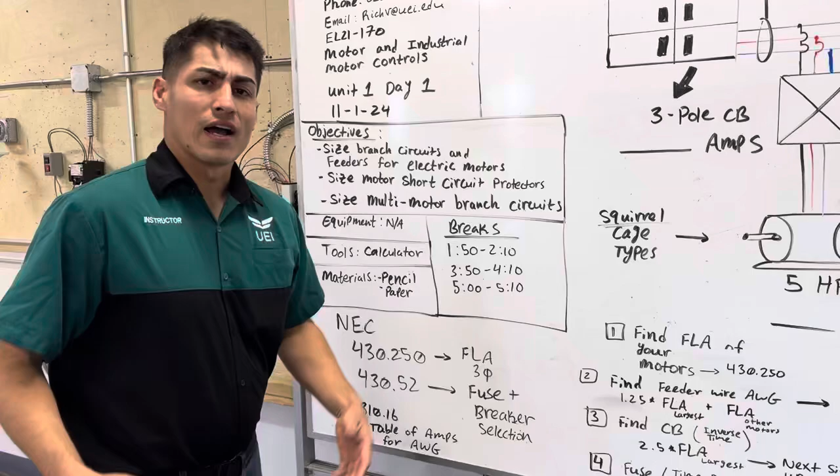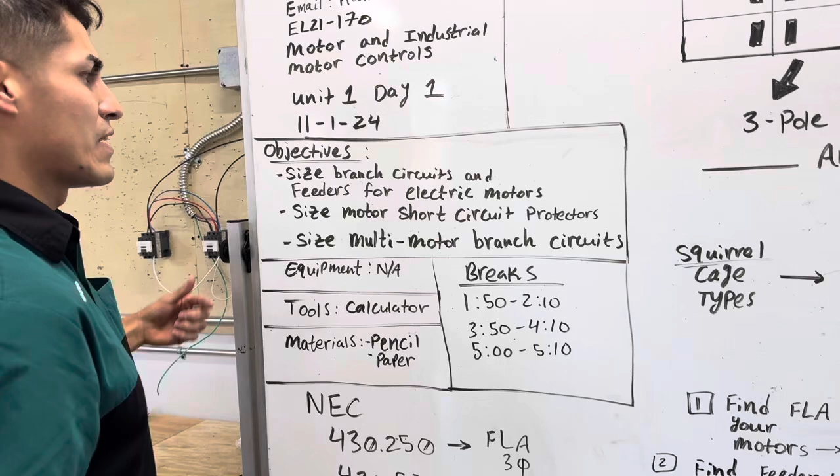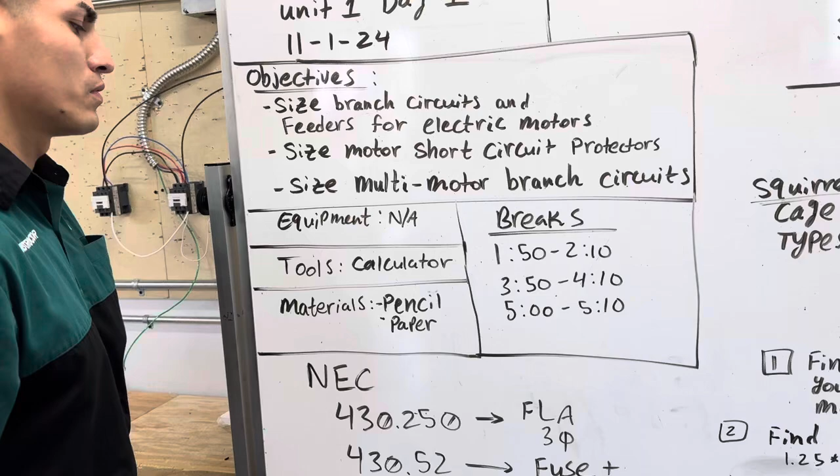Our objectives: size branch circuits and feeders for electric motors, size motor short circuit protectors, and size multi-motor branch circuits. Equipment: non-applicable. Tools: calculator. Materials: at least have a pencil and paper or a pen.

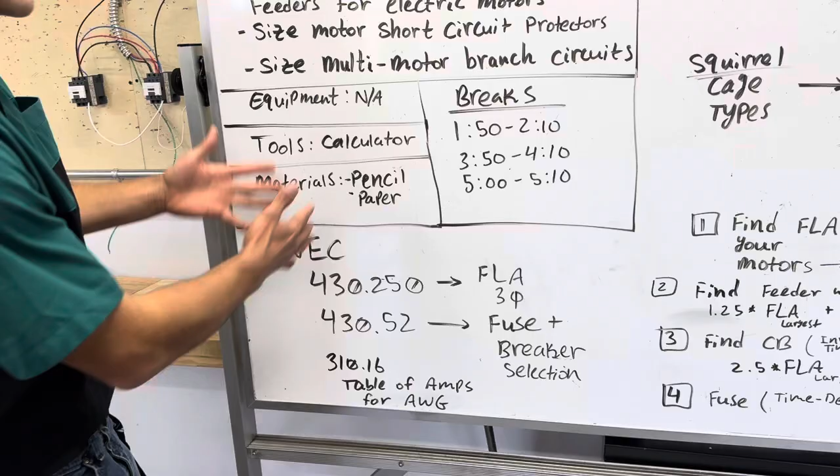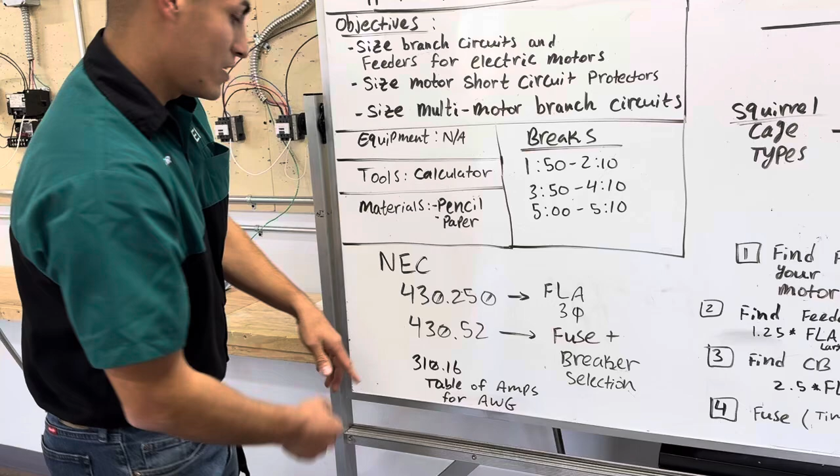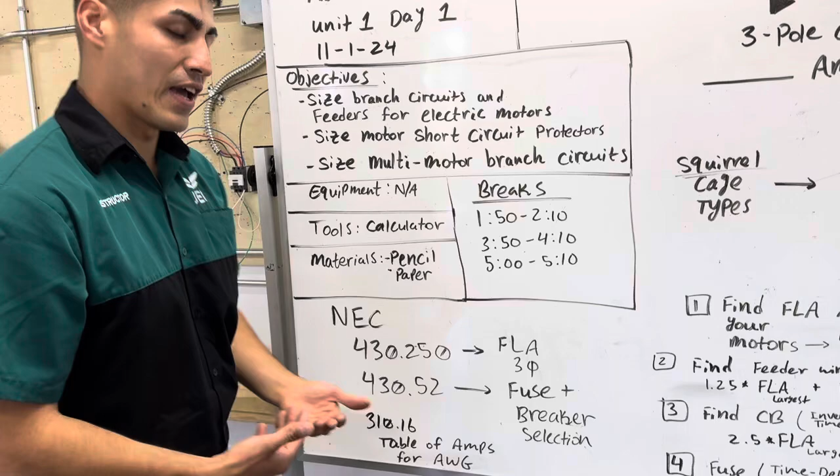Now we're going to refer to some NEC codes that are going to help us in selecting these devices. First, 430.250 for full load ampacities for three-phase motors. 430.52 is for fuse selection and breaker selection. 310.16, or page 73 of our Ugly's book, will help us select AWG depending on ampacity. In addition, we have 240.6A, which will help us see the next size up for our breaker or fuse, which is very helpful.

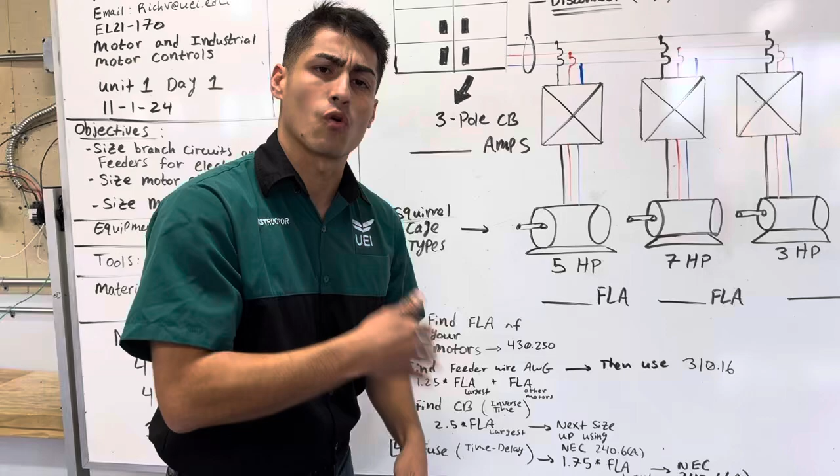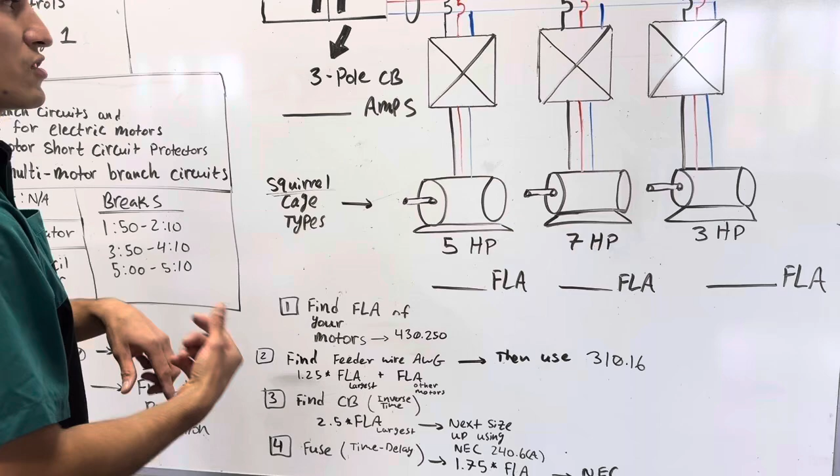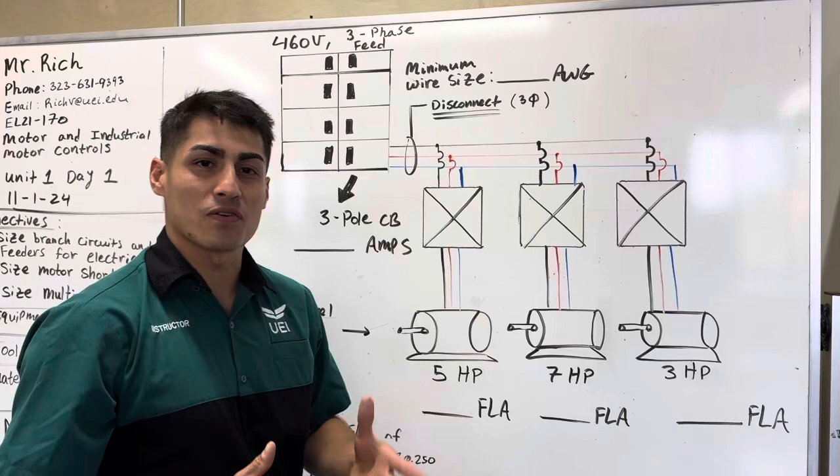Now this is our system here. We've got the MSB, our main panel, and then we have a 3-pole circuit breaker. So it is up to us to find out what amperage that breaker is going to be. In addition, we are required by code to have a 3-phase disconnect here. The disconnect will have fuses, so it's up to us to also find what fuse ratings we need. That will depend on the FLA of the motors.

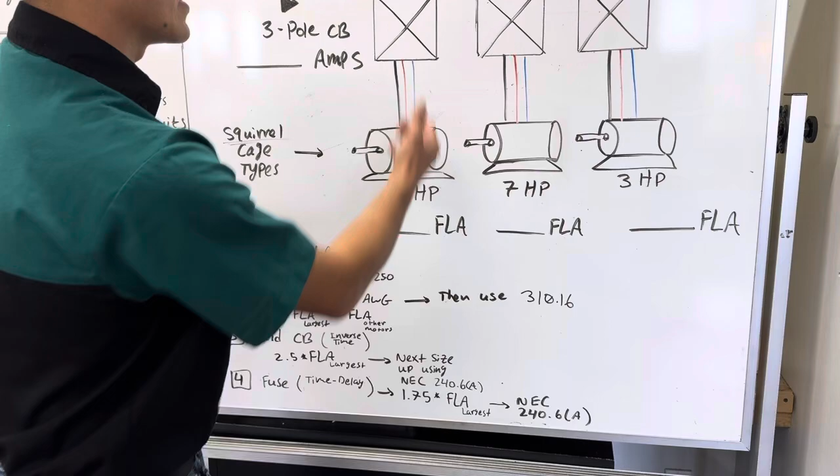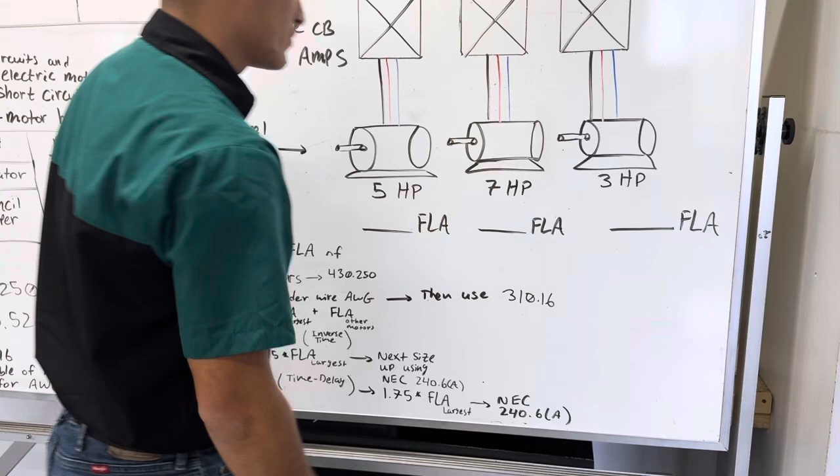And lastly, let's go over the feeder size of the wire. We have to find what wire size we need, depending again on the full load ampacity. This here is your overload protection relay and your magnetic starter, which is important.

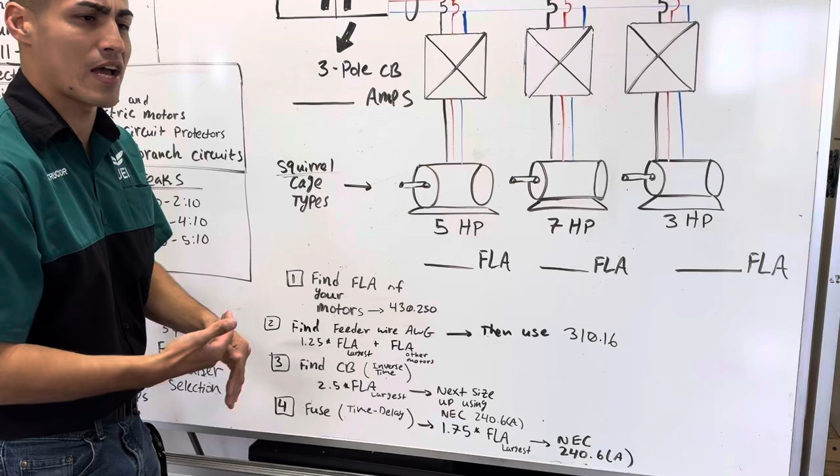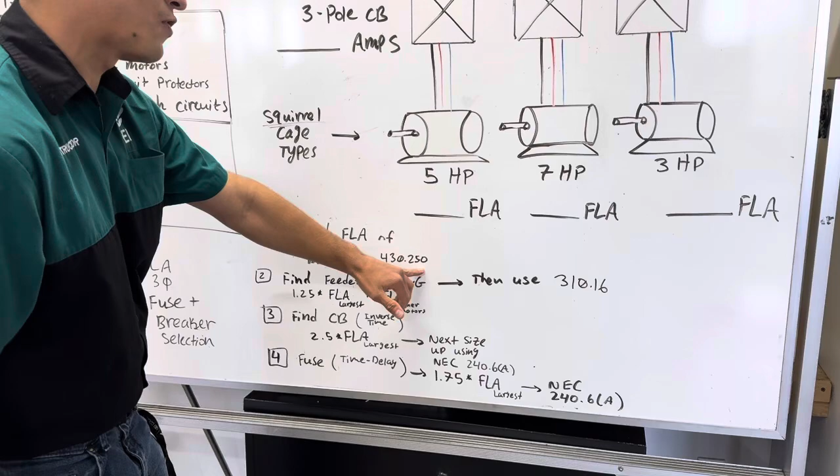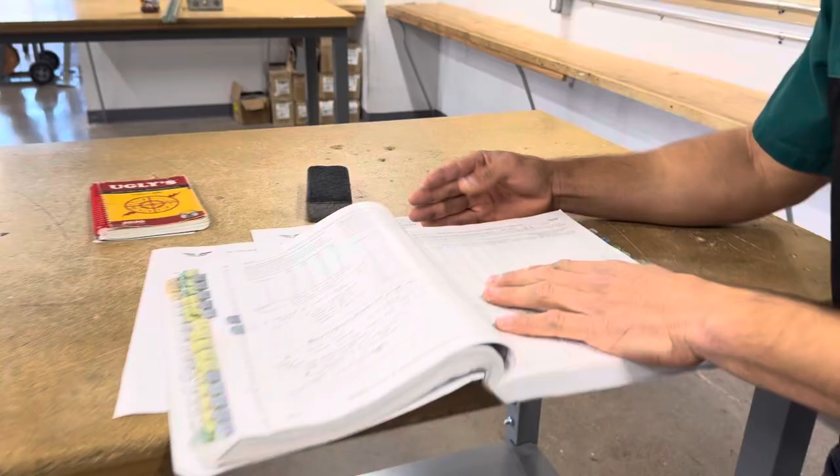Let's emphasize that we have a squirrel cage type motor for all of these. So the first thing we're going to do is find the FLA of our motors. We're going to refer to 430.250 using the horsepowers and the voltage from our main. Let's take a look at the table here. We have 5 horsepower. This is 430.250, full load current, 3-phase alternating current motors. We look at this column here. Now we have 5, and we're going to go horizontally in this row until we hit 460. The first one says 7.6 amps, so we'll go ahead and write 7.6 amps for our 5 horsepower motor.

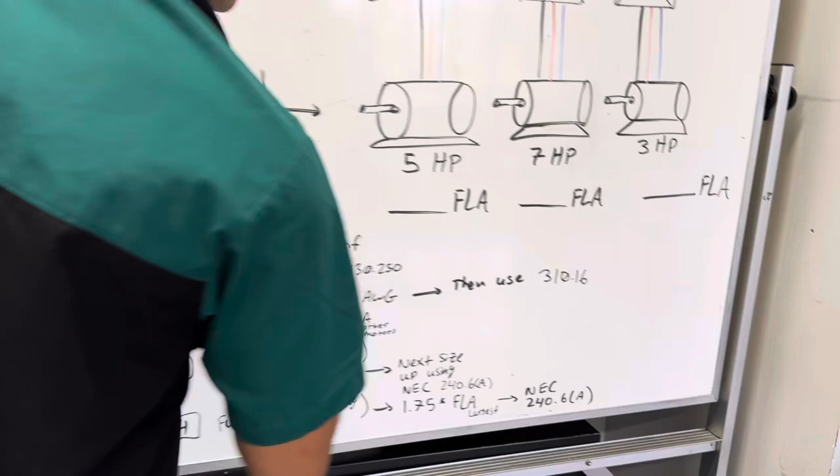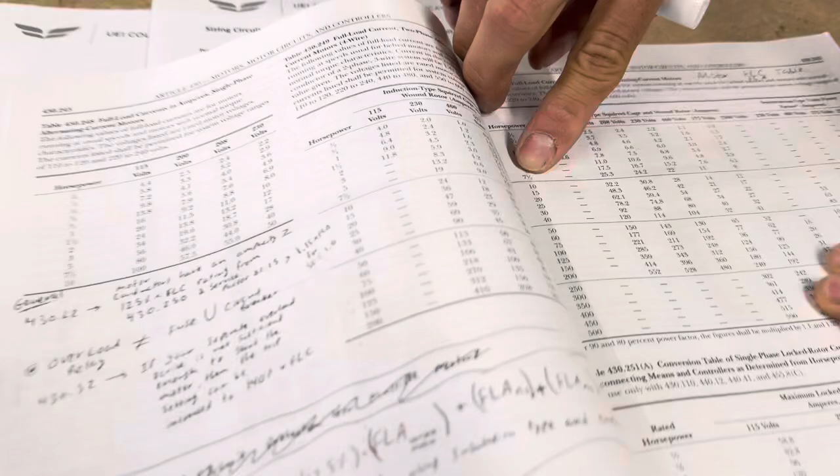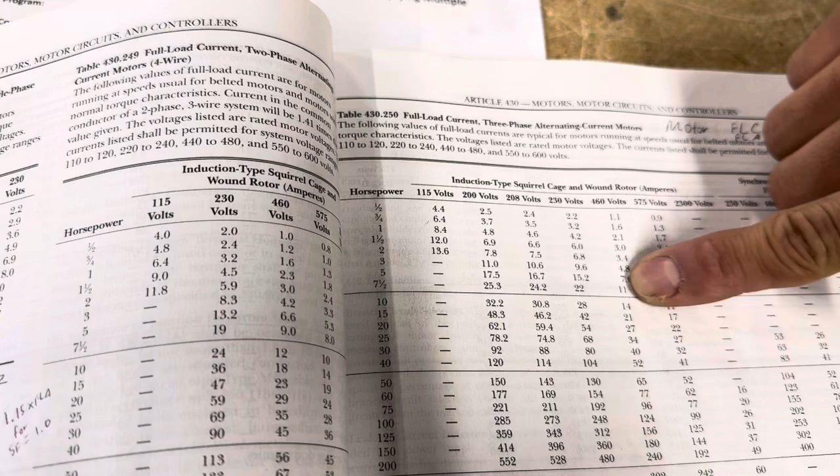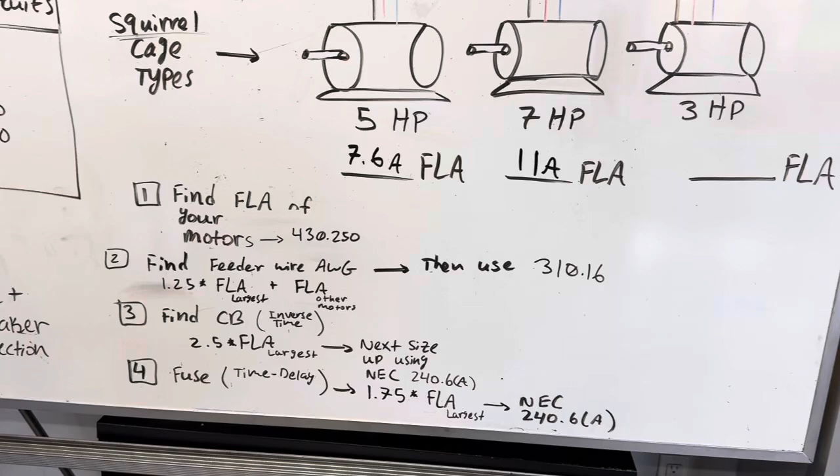Next, we're going to do 7 horsepower. We don't have a 7 horsepower, but we do have a 7.5 horsepower, so we'll use that one. We go to the right and stop at 460 volts, and it says 11 amps, so we'll write 11 amps. Last is a 3 horsepower motor, that's the last one we need. Again, we go 3 horsepower and follow horizontally until we hit 460 volts, and we're at 4.8 amps, so we'll fill in 4.8 amps.

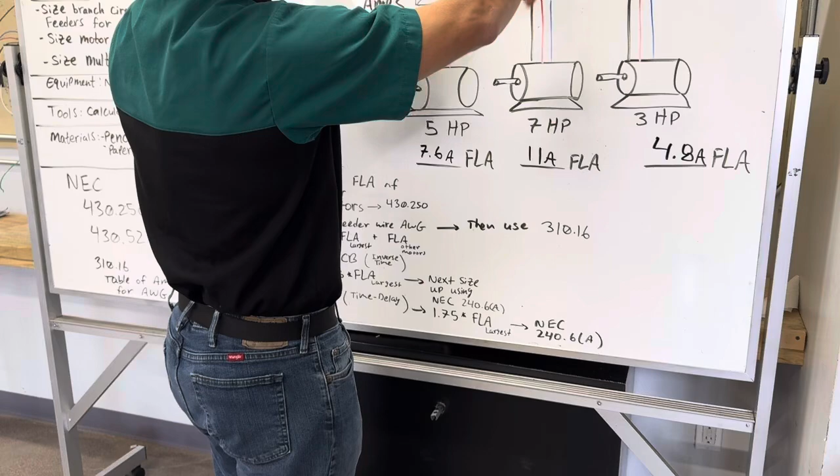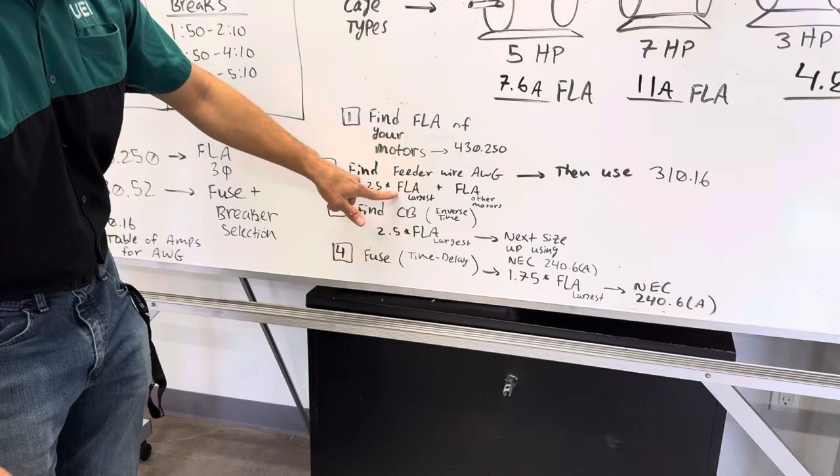Now step number 2, we're going to find the feeder wire. This is the feeder wire that's feeding into the overload relay and magnetic starters, and also going to your motors. We have to follow this formula: 1.25 times FLA of the largest motor, plus FLA of the other motors. The reason we use the largest is to avoid nuisance tripping, meaning there's a high overload inrush current that happens for a fraction of a second. We have to account for that, because we don't want to trip a breaker or fuse if there's only a fraction of a second of inrush current.

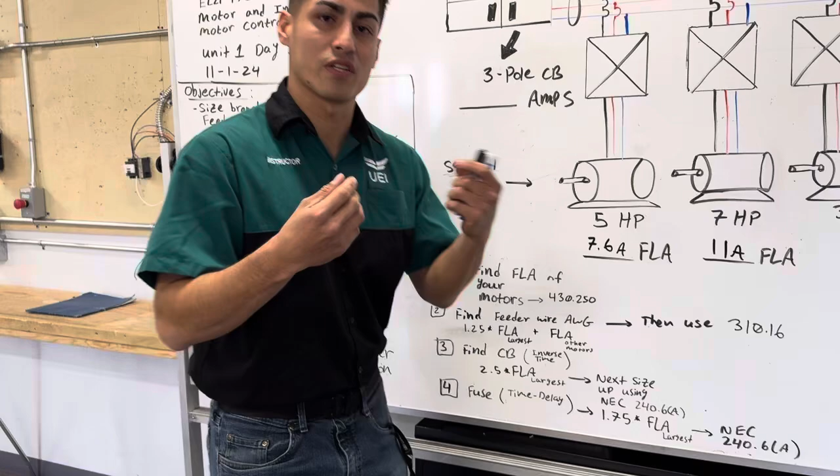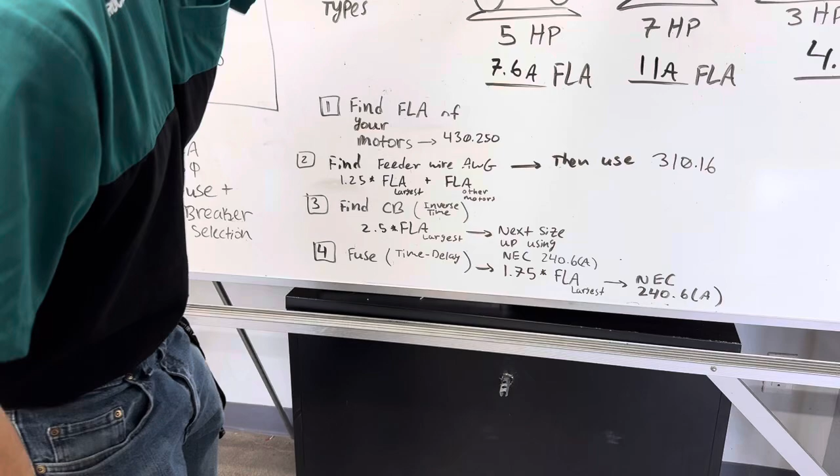Now, using this formula, we're going to go ahead and multiply 1.25 times FLA of our largest motor. Here we have 7 horsepower, which is our largest motor. So now we're going to take out our calculator and input that right now.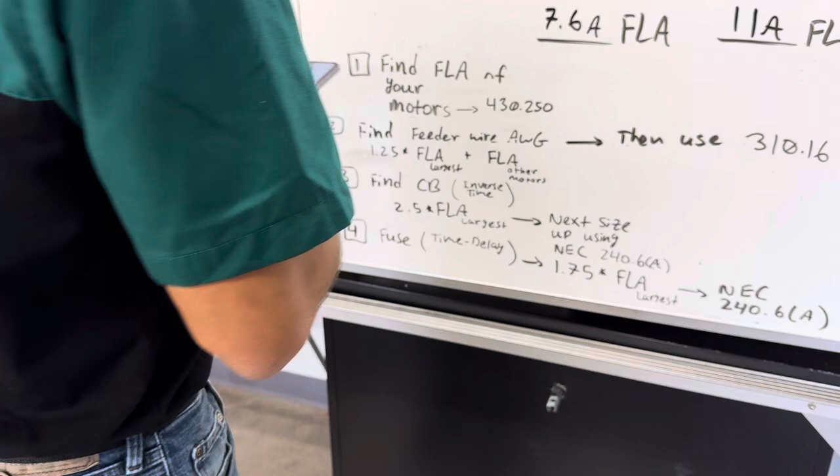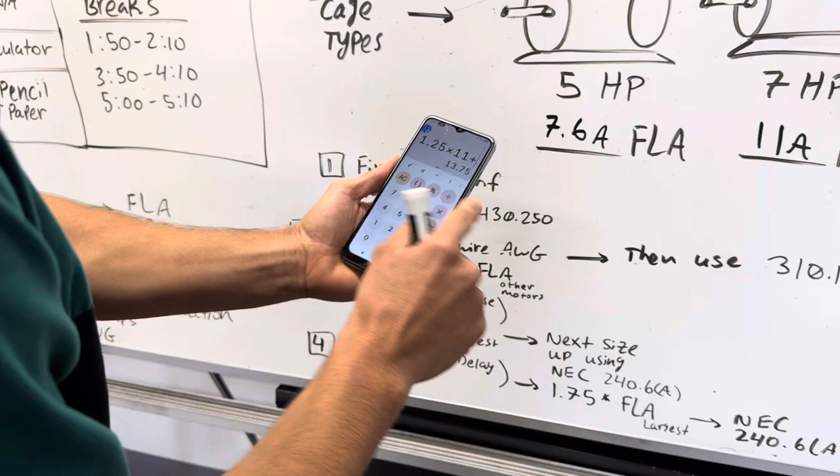1.25 multiplied by 11 plus the sum of FLA of all other motors, plus 7.6 plus 4.8, and that gives us a total of 26.15 amps.

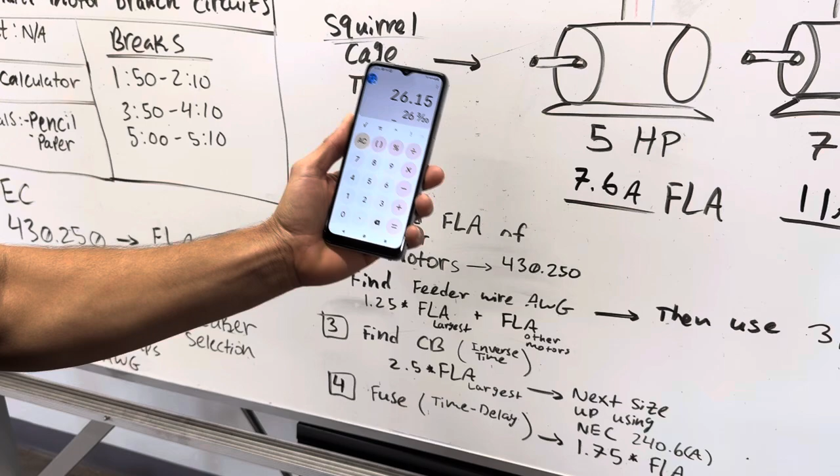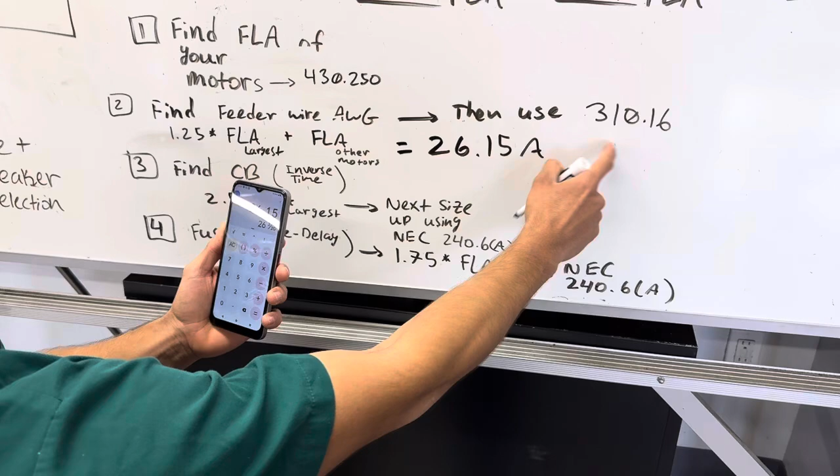So here we're going to have 26.15 amps. Now we have to use 310.16. So in our NEC we have to refer to 310.16. Since we're given these books, we're going to go ahead and use page 73 since it's a lot easier to use. So now here we have to look for 26.15.

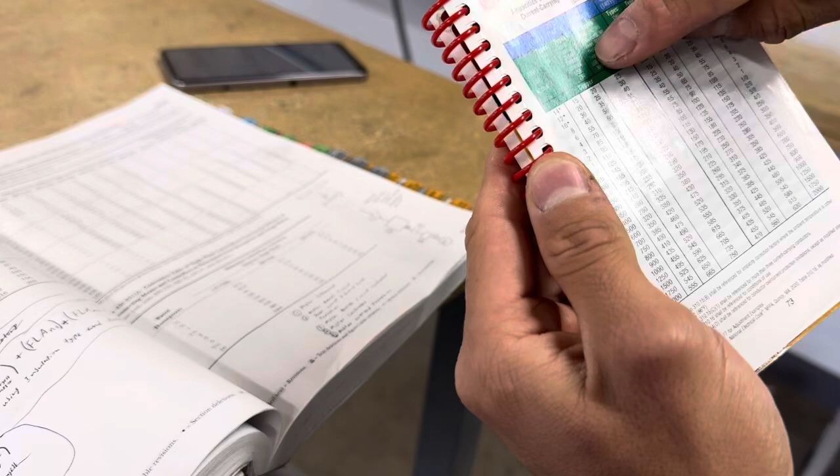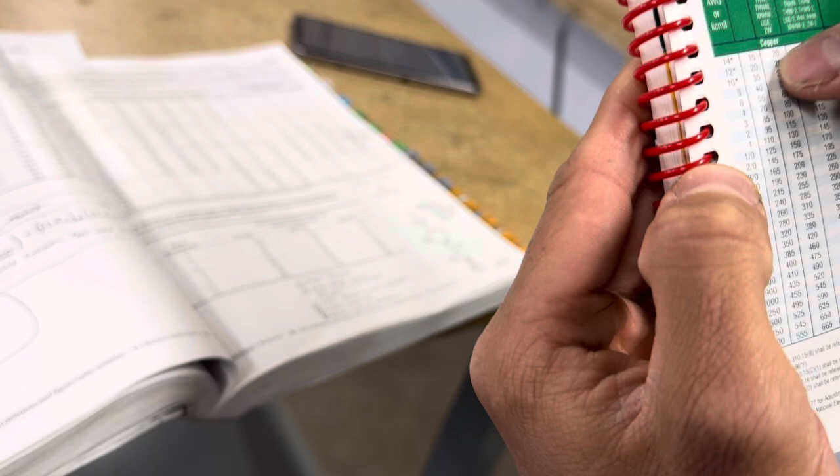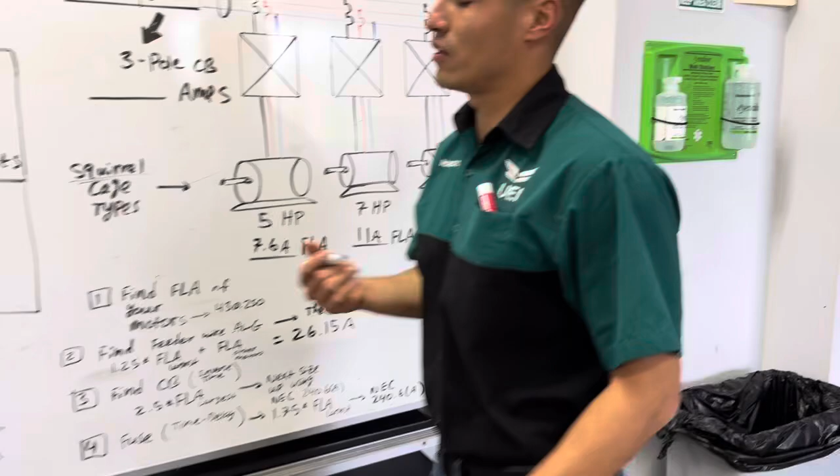This is THWN wire. Under the scenario, we are dealing with weather conditions.

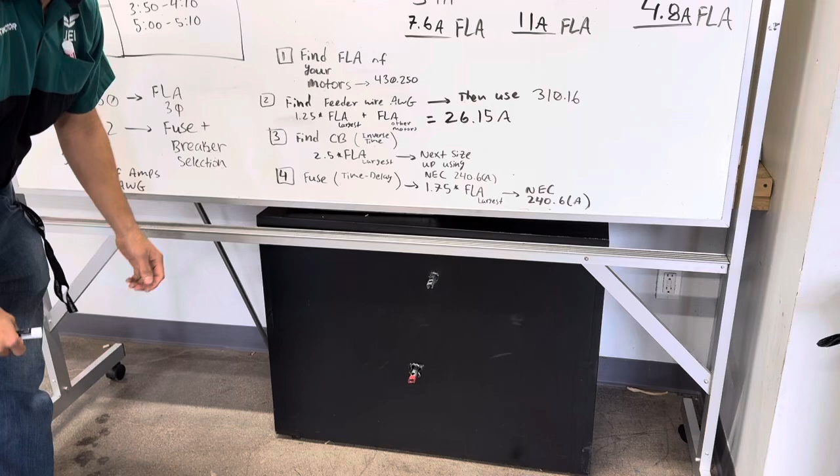Now, next thing, find circuit breaker. So we're going to use inverse time. This accounts for many appliances being plugged in at once.

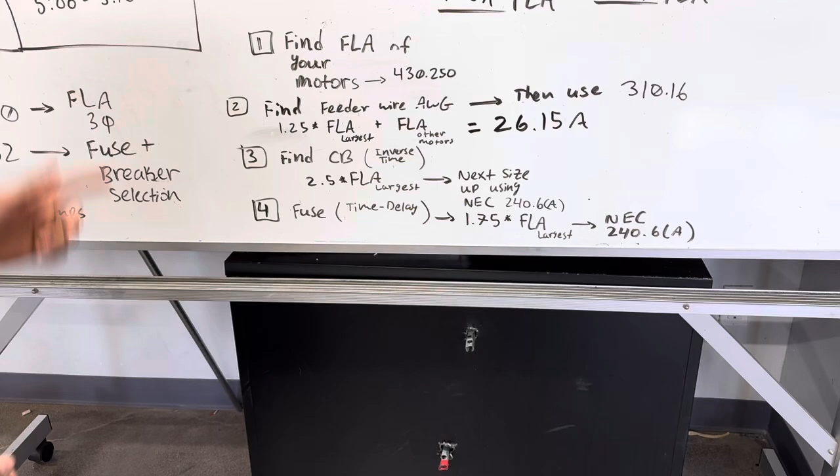So now we use the formula 2.5 times FLA of the largest motor. Now where do we find this one? This comes from NEC 430.52. So now we're going to refer to 430.52 for inverse time breaker here.

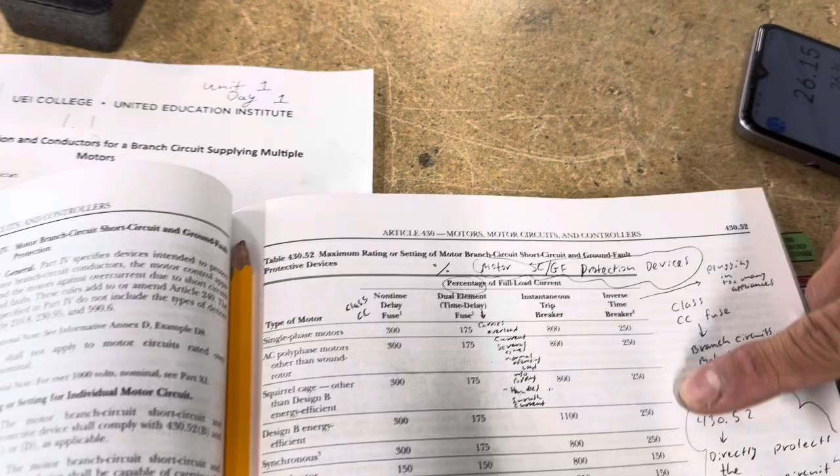These are percentages, or in other words, our multiplier. Since we're using a squirrel cage, we are going to use 2.5, or in other words, 250%.

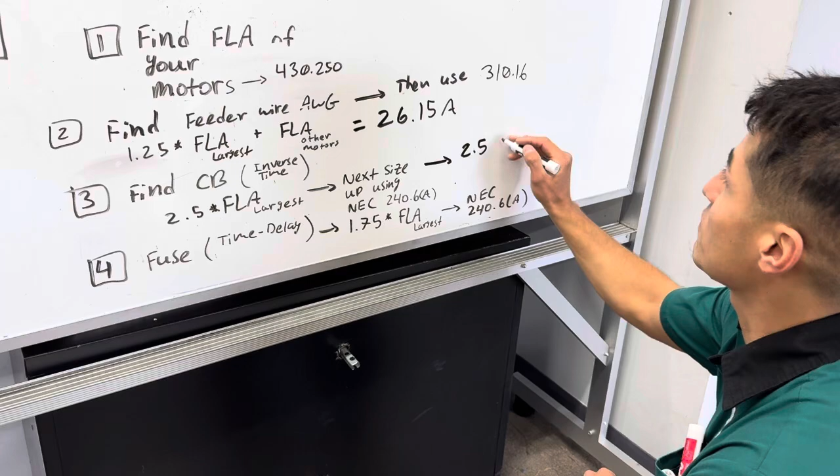So we're going to use 2.5 times FLA of the largest, and again, it's 11 amps. And we'll see what that gives us right there.

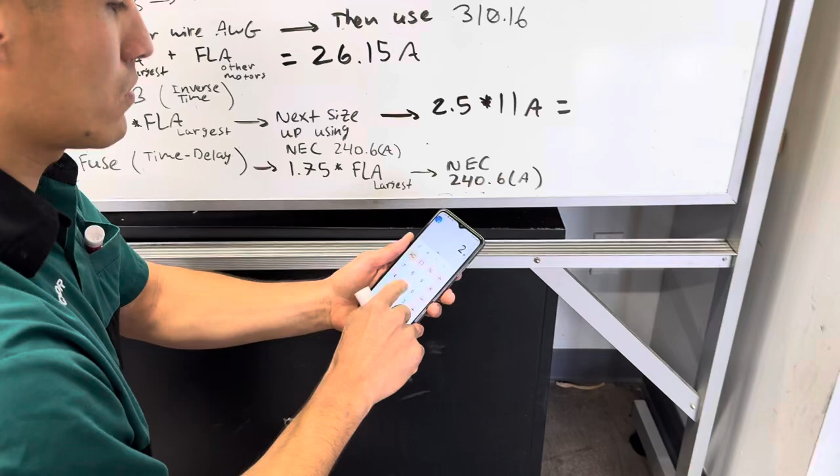Hey, it's Friday, we can do it in our head. I'm not gonna do it in our head. Here's the calculator. 2.5 times 11 gives us 27.5 amps.

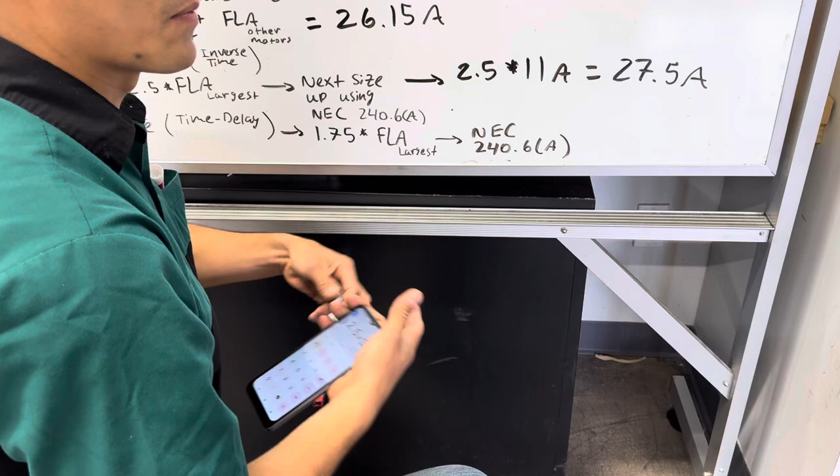If we are not sure what the next size up would be, but we know it to be a 30 amp, this is where we refer to 240.6a. 240.6a is going to be on page 100 of your NEC.

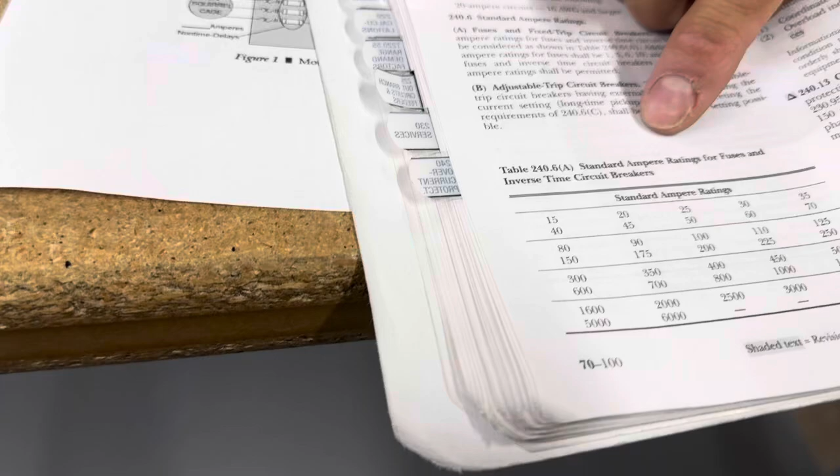Here we have standard ampere ratings for fuses and inverse time circuit breakers. After 25 amps, we have 30 amps. So we will go ahead and select a 30 amp 3-pole breaker.

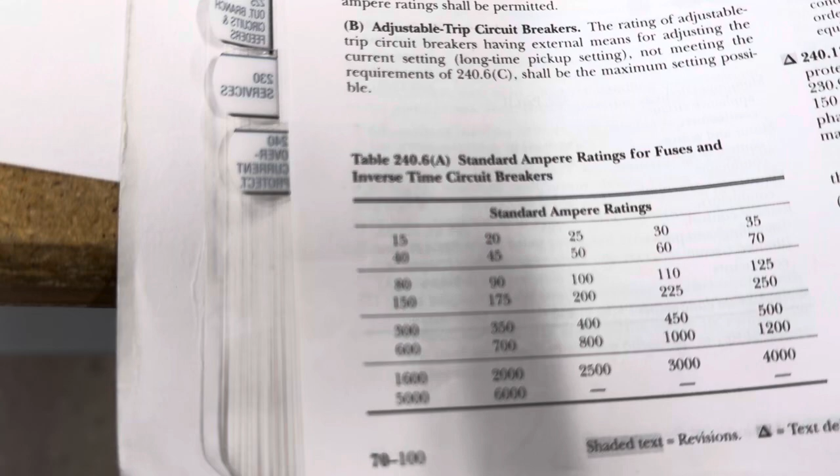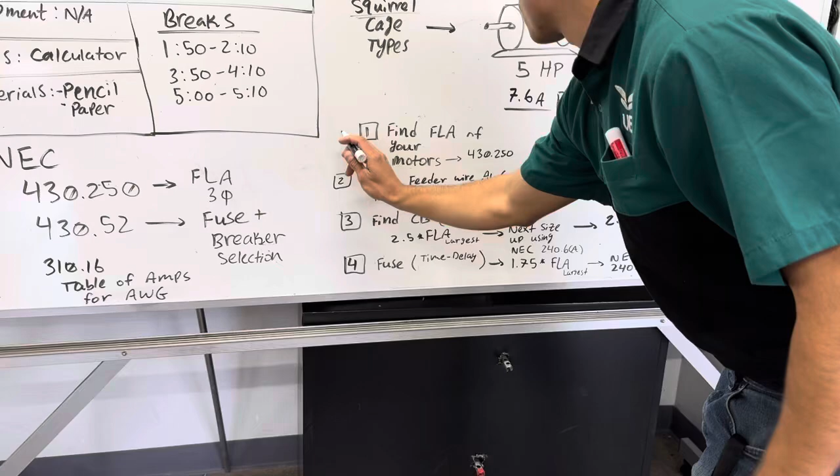So now we're finished with finding FLA, finding the feeder wire, finding the breaker. Now we're going to find the fuse for our 3-phase disconnect here.

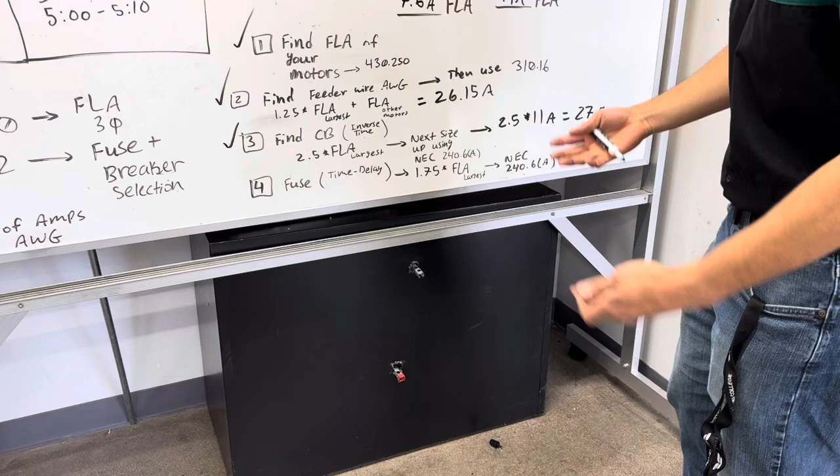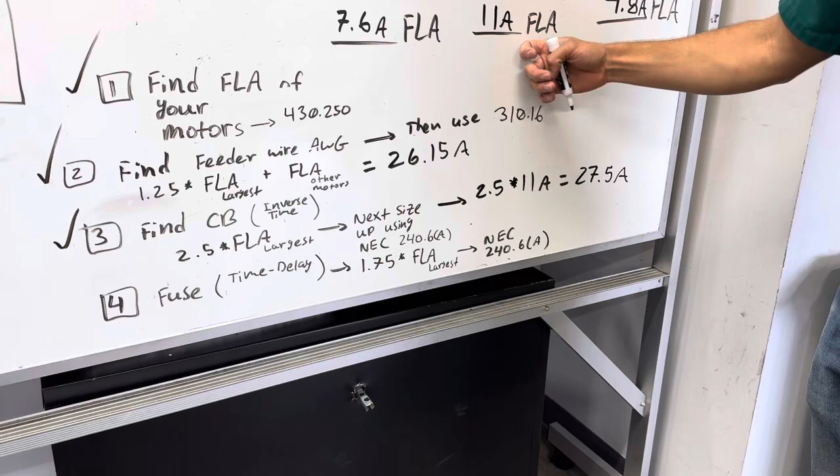Similarly, we have to follow 430.52. That's 1.75 times FLA of the largest motor. Hasn't changed, so all we got to do is multiply 1.75 times this guy right here. This is going to give us 19.25.

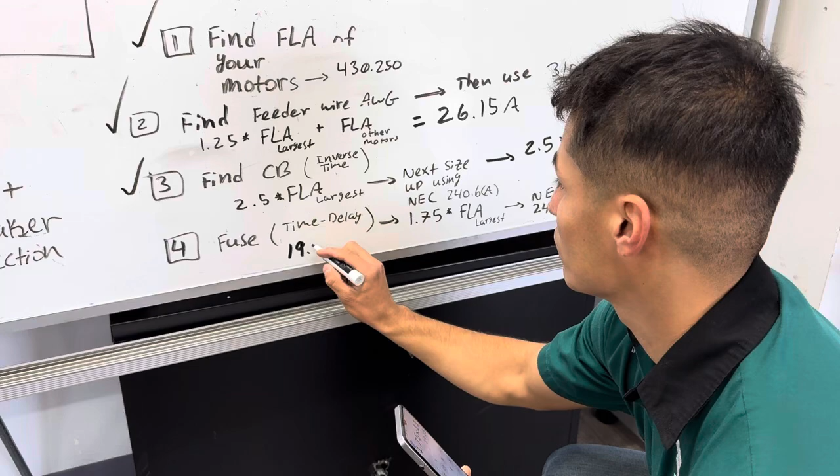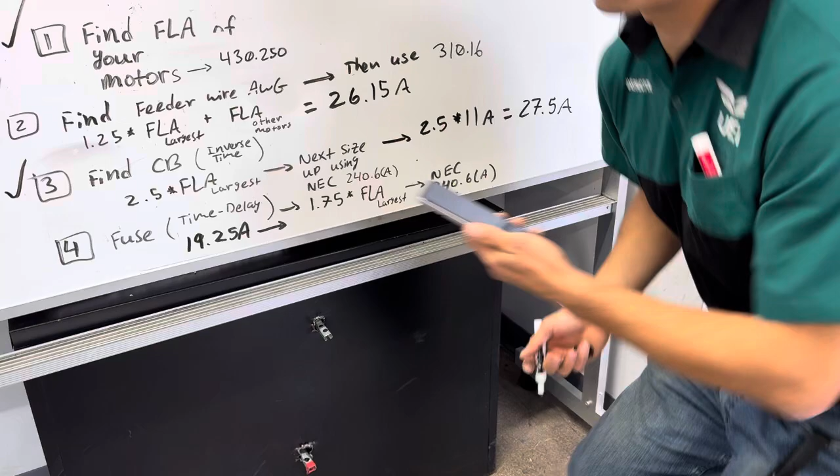Referring to 240.6a, we have to use the next size up. So the next size up is going to have to be, just to be sure, a 20 amp fuse. So we are good to use a 20 amp fuse.

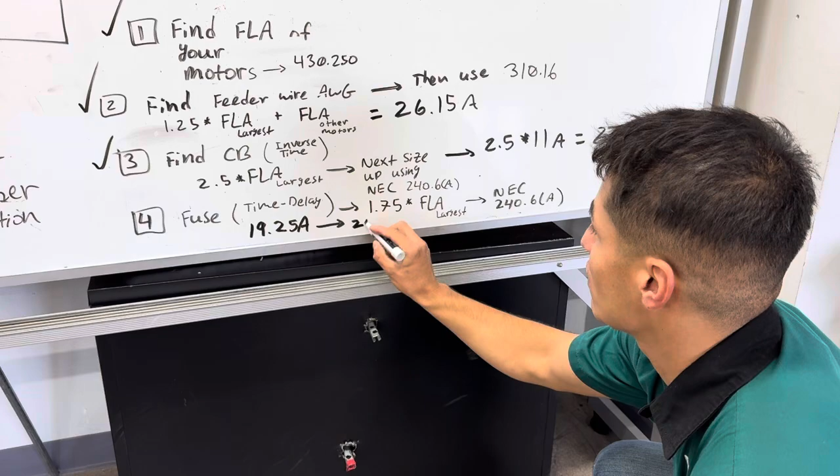If you like, you can also use a 25 amp fuse to allow for some tolerance. Okay, there's the 80% rule.

For example, if you have 100 lights on a 15 amp breaker, 80% of that 15 is gonna give you 12. Running 100 lights in parallel gives you 11 amps, so you're within range.